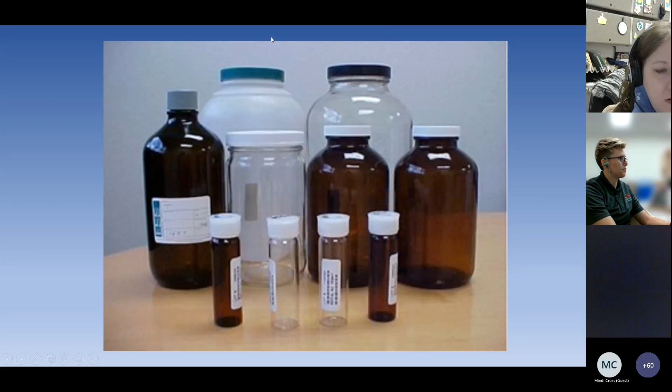Okay, sorry for the wait. While we're trying to figure out if our AZ Water president is going to join, I think this would be a good time to do kind of a mini roundtable.

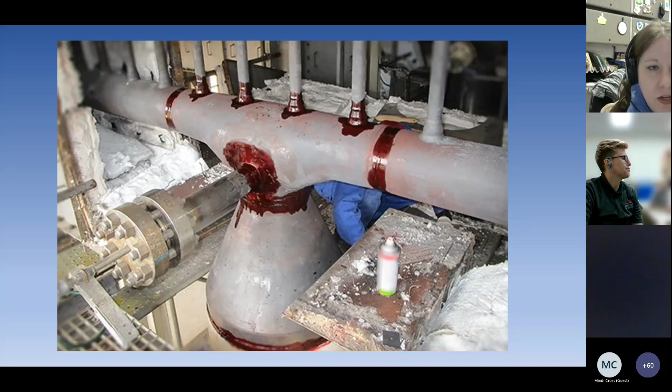So we had a question from one of our AZ Water Pretreatment FOG members about commercial inspections, like FOG type inspections. For those of you who do this for your job, how many do you conduct a week? Or if you have a set criteria, maybe over a month period, how many do you typically accomplish over that period of time? And if there's any specifics, like if you have to hit a number of places, or does that include re-inspections or follow-ups? So if you'd like to put that in the chat, we are curious about your input there.

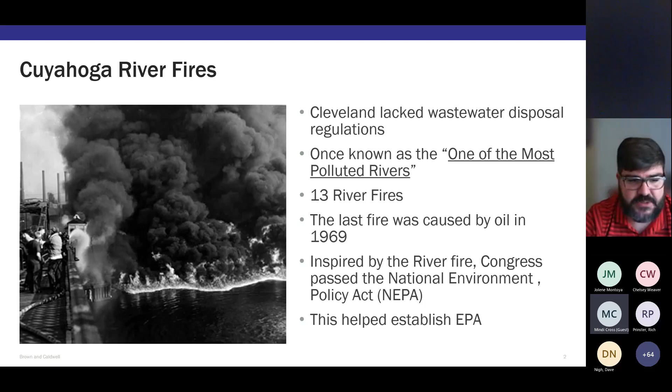And so with that, the Clean Water Act essentially sets up the NPDES program, which, if you're not familiar with that term, stands for National Pollutant Discharge Elimination System. I feel like they could have came up with a little bit easier phrase to say, but that's what we got. And ultimately, it was designed to, as it simply states, eliminate pollutants from waters of the United States. And so with that, we also got the federal pretreatment program.

And so the federal pretreatment program is essentially charged with establishing rules and regulations that help prevent Cuyahoga River fires, right? Help prevent incidents that negatively impact the environment, but also negatively impact the wastewater treatment system as a whole. So the collection system, the workers, the equipment, the treatment plant itself, any potential opportunities for reuse or recycling wastewaters or sludges or biogas, whatever those may be.

The pretreatment program is essentially designed to prevent pollutants from being introduced into the publicly owned treatment works that would cause interference or cause pass-through. So that's essentially the objectives of the National Pretreatment Program. So why do we have pretreatment? So here's just a few images of why we need treatment.

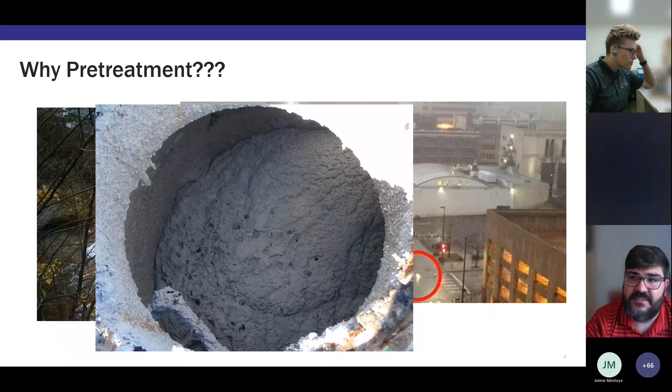It took several days to vector and jet this line to get it to where it would actually flow again. This is foam at a wastewater treatment plant. I don't recommend anyone ever go and stand in the foam at the wastewater treatment plant, but this does periodically occur at treatment plants. A lot of times it can be caused by industrial users.

When I managed the City of Memphis's pretreatment program, we had a soap and shampoo manufacturing facility in town that routinely would, well, they wouldn't try, they would do it. They would discharge off-spec products without any approval, without any treatment or defoamers added. This is not the Memphis wastewater treatment plant, but this is essentially what it would wind up looking like once it got into the aeration basins.

I have young kids and they like to take bubble baths. If you pour bubble bath solution into a jacuzzi hot tub, it just continues to intensify and get bigger and bigger and bigger. And that's essentially what happens in the aeration basin. It's just kind of like a big jacuzzi hot tub, right? And once you get those surfactants and bubbles in there, it really could become a problem at that point. So definitely something to watch for.

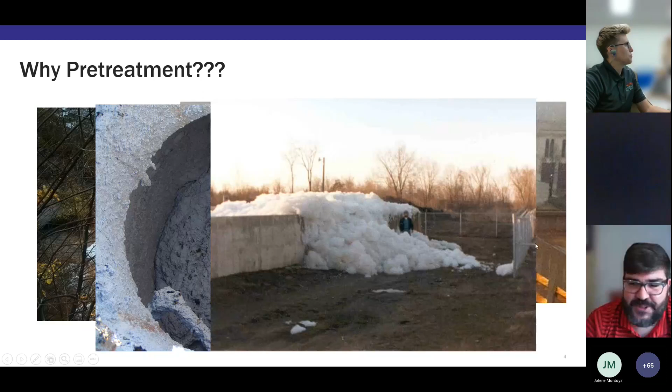And this is just a picture of a fish kill that I found on the internet. Essentially, that's kind of what we're trying to prevent from the receiving stream perspective. The last thing we want is for our receiving stream to wipe out all of the life that lives there. So that would be an example of pass through for sure.

And then finally, this is a picture of a cross section of a sewer line that had the entire bottom corroded out due to low pH discharges downstream of an industrial user. I believe this was a jelly manufacturer, if I'm not mistaken, and they used a lot of cleaning solutions that were acidic as well as caustic, high and low, but predominantly their wastewater was relatively low, and they just absolutely destroyed the downstream collection system.

So what is pretreatment? Now I think we kind of understand why we need it. So the next step is, what is it really? What do we do with respect to pretreatment? So pretreatment, in general, the definition is the reduction of the amount of pollutants or the elimination of those pollutants, or even taking that a step further, alteration of the nature of those pollutants. So maybe converting it into something different that's not so bad or detrimental in the wastewater before it's discharged or introduced into the publicly owned treatment works.

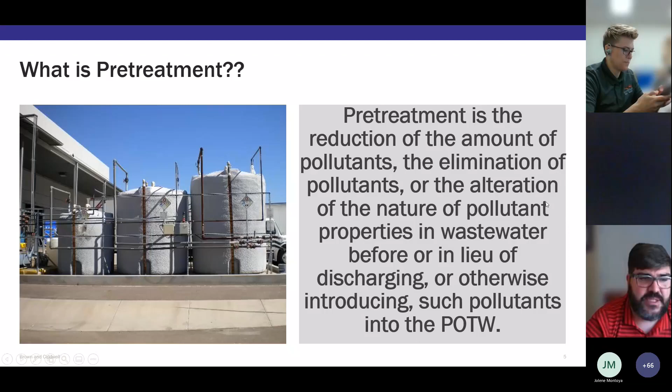So what we mean by that is essentially, it's treating your wastewater in some cases before it's discharged. Maybe it's shipping some of these wastes offsite for alternative disposal, because it just can't be handled very well from a treatment perspective on site. It doesn't do very well in the collection system. So that's another potential for pretreatment. But in general, it's essentially eliminating, reducing, or altering the nature of that pollutant before it gets discharged into the collection system.

And so we have a whole program, essentially. I think a good portion of you work for a municipal pretreatment program, and just like the federal regulations charge EPA with developing and implementing the program at the federal level, that essentially trickles down to us as municipal people to implement in most cases. There's a few caveats, I'll show you in a minute, where the municipalities don't actually implement their own pretreatment programs. But in general, the vast majority of pretreatment programs are operated and implemented by the wastewater utility receiving that waste.

So generally speaking, the federal regulations state that POTWs with a combined design flow of greater than 5 MGD, and you either receive wastewater that's subject to pretreatment standards, so essentially categorical wastewater, or an SIU, so it could be categorical or non-categorical, but facilities that meet that definition of a significant industrial user, or you receive pollutants which could pass through or interfere with the treatment plant, then by federal rule, you're required to develop and implement a pretreatment program.

Now, I say that because there are some caveats to that rule, depending on how your state wants to implement their state program. So I'm in Tennessee, and in Tennessee, it doesn't matter what the size of the treatment plant is.

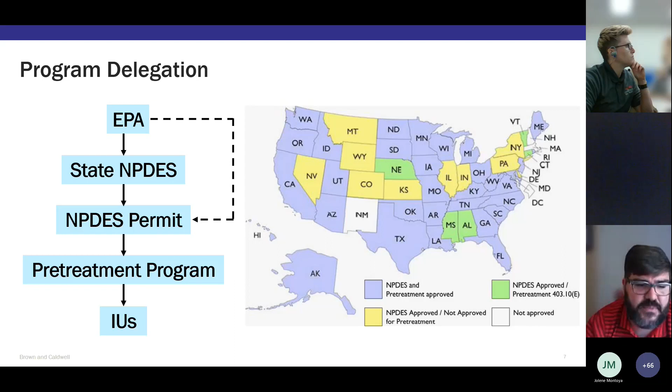And then there are some states that you see in yellow that have approval to issue NPDES permits, but they aren't approved to oversee and regulate pretreatment programs. So Nevada, for example, is one that would be close to you all, where the state doesn't have that delegation, and so EPA Region 9 ultimately regulates those pretreatment programs.

Any questions at this point? Feel free to drop them in the chat, or unmute yourself and speak up. Joshua, it doesn't look like there's anything in the chat for you. Okay, thanks, appreciate it.

So this here, I'm not going to go into a lot of detail about. I just wanted this slide deck to be a place that you could go back and use as a reference. So here basically what we have is the high points of all the federal regulations and where they're located. 40 CFR Part 403, from a municipal pretreatment program perspective, is what regulates us or tells us what we have to go and do.

There are obviously more; there's 403.1 and 403.2 that I've left out. I've only included the ones that are typically referred to or used on a daily basis. But don't take this to mean that those other sections aren't important. They're just not ones that we typically use every single day in our jobs. So, just the high points: 403.3 is where the definitions reside. So when I define the word pretreatment, that comes straight out of 403.3.

403.5 and 6 are pretreatment standards. So prohibited discharges are in 403.5. That's where it essentially says thou shalt not discharge corrosive wastewaters. Thou shalt not discharge waste that would cause an obstruction to the collection system, things like that.

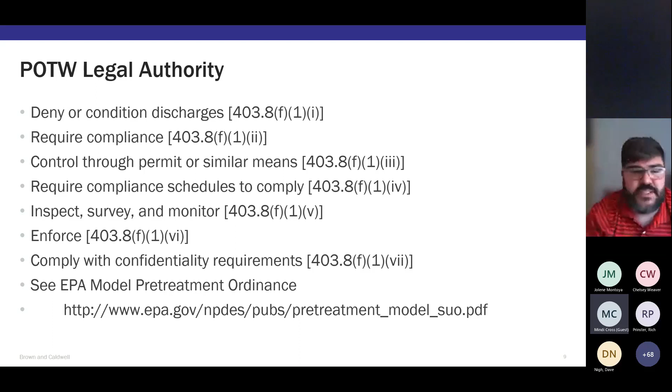So then when we talk about the procedures, what programs are required to do, we're required as pretreatment programs to first and foremost identify and locate all possible industrial users. And that's not just significant industrial users, that's all industrial users. Because we have to then make that determination of whether or not they meet the definition or criteria of an SIU, and then that puts them in a separate category. But we have to locate and identify them first and foremost.

And then once we have identified them, we have to understand the character and volume of pollutants that they may discharge to the treatment plant. And so at that point, we must notify them of any applicable standards that they must meet. Typically speaking, for an SIU, that's done through the permitting mechanism. It's essentially requiring them to submit for and receive a permit before they discharge, and that notifies them of their applicable pretreatment standards, because those standards are in the permit.

Us as pretreatment programs, we have to then receive that analytical data and analyze it to make sure that they're in compliance. We have to conduct random sampling periodically. I think the federal regulations say that we as control authorities have to sample and inspect all of our SIUs annually, and in some cases it can be more frequent than that. So understand and know what your requirements are in either your approved program or in your NPDES permit, because I have run across some programs that require more frequent sampling and inspection of their significant industrial users than the federal definition.

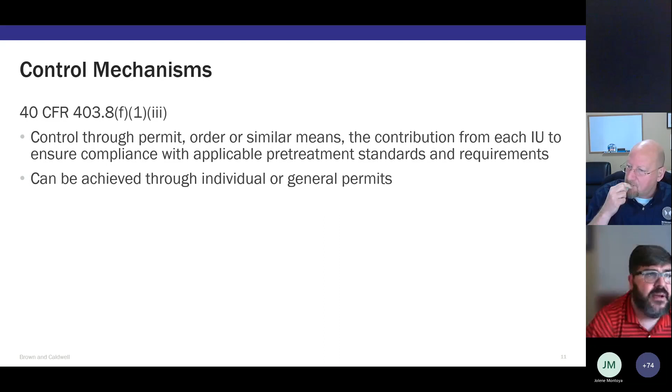So for example, and I'm not saying that you should do this, but I have heard of people that have developed a general permit where there's one document that's the permit for all dental users, and then the dental facilities would submit a notice of intent to seek coverage under that general permit. And ultimately that one permit covers any of those facilities that you approved to seek coverage under that permit. I've also seen it for water utilities that discharge filter backwash water. But it's generally used when you have multiple facilities that are all very similar or essentially identical to one another.

So instead of issuing 10 permits to 10 different industries, you would issue one permit to 10 different industries. So, as the phrase streamlining suggests, it helps minimize the amount of effort and time required to oversee and regulate those facilities.

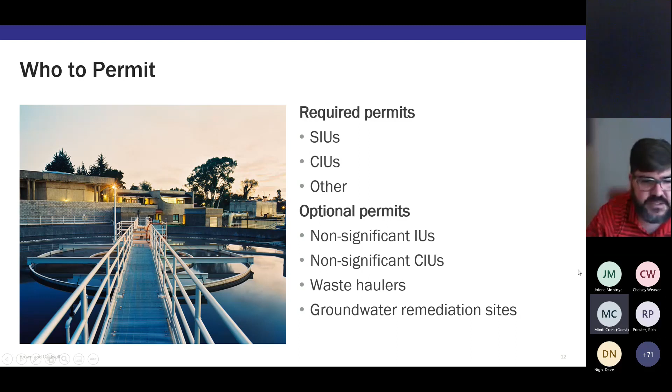So let's keep going. As the pretreatment program, we're required to perform compliance monitoring. I spoke about this earlier, and I just want to point out, we're required to do this independent of any information provided from the industrial user. There are some ways to get around this, but generally speaking, you should take your own equipment out there, your own composite samplers, your own sample tubing, and install your own equipment that's separate and independent from theirs, and collect those samples.

And I have seen where sometimes you'll use their equipment and put a lock on it to make sure that they can't tamper with it. I think there are some caveats for being able to use that equipment. But generally speaking, first and foremost, you should try to use your own, just to ensure that it's independent of anything provided by the industrial user.

These can be announced or unannounced. I typically try to always recommend unannounced initially, but I know that there are certain circumstances where you need to do announced inspections or sampling events, just because maybe it's really difficult to get on site to these facilities. Maybe it's a Department of Defense, a DoD site that requires a lot of security clearances prior to even being able to get on site.

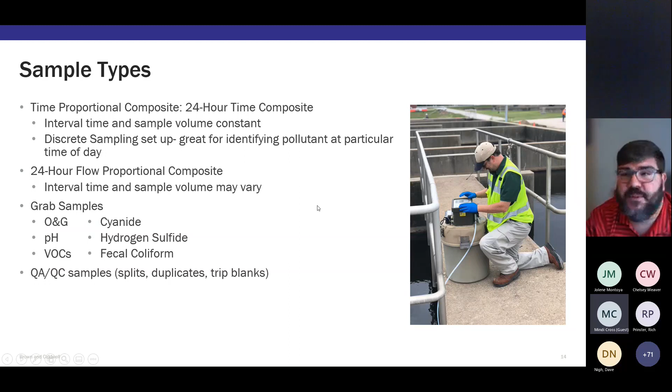Composite flow proportional. I'll just go ahead and tell you, flow proportional sampling may be the most difficult thing that you will ever attempt to do as a pretreatment program. As Christy's saying, it can be virtually impossible in certain circumstances. So I'm not going to go into my rant about flow proportional sampling, but I've tried to do it. I have done it, and it is extremely difficult. I don't think the people that wrote the federal regulations ever went out and collected flow proportional samples. I'll say that.

And so that's why we typically try our best to collect flow proportional sampling where we can, because time proportional is not a very accurate representation of the waste stream that's being discharged for facilities that have high variability in their flow. So just be aware of that.

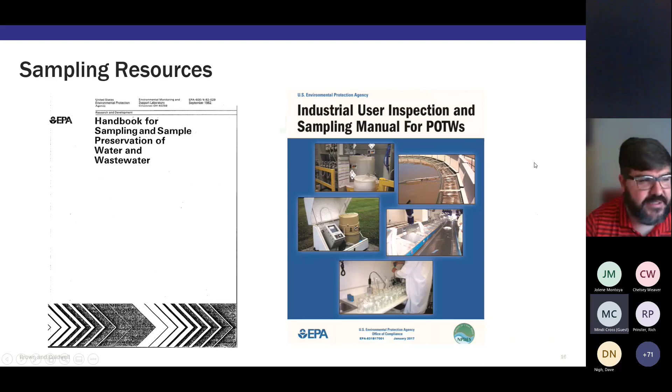This is why we go out and conduct compliance inspections, to make sure that the facilities are doing what they say they're doing, discharging where they say they're discharging, and discharging what they're supposed to be discharging. I can't stress enough, I think that compliance inspections are probably, just in my personal opinion, the most important thing that you can go out and do at these facilities.

And so we're required to conduct this surveillance as municipal programs. We're required at a minimum annually to go out and look at these facilities. Now, with some of the new streamlining regulations, for example, non-significant categorical industrial user or middle tier categorical industrial user, which middle tier isn't used a whole lot, there's some reductions in the frequencies that you have to go out and perform these inspections.

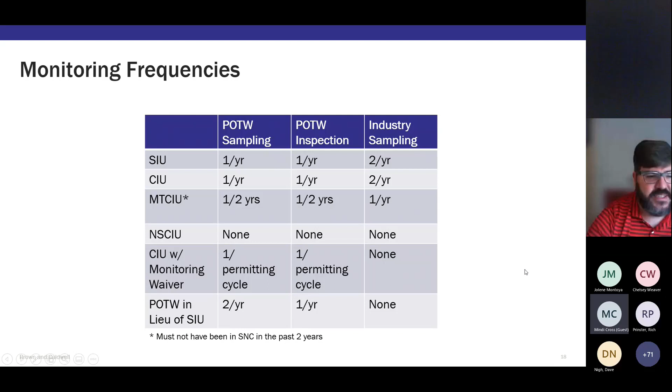And so I have this broken down in a matrix style format for you to use and just to have as a resource, just so you're familiar. So there's several more scenarios than one would typically think, but hopefully you can use this at some point and help you understand what you're supposed to do for each different type of industrial user.

So with those inspections, we have two different styles. We have a scheduled inspection that we're going to do. That's our annual inspection. We're going to go out and do those every single year. Again, we can do those announced or unannounced. And I understand reasons for doing both, but typically speaking, I strongly recommend at least to initially try the unannounced style. And then, if it's truly not feasible, then try the announced style.

But I will say that a lot of times you'll get a little pushback. I've seen the security guards that sit out front of these industries. Sometimes they feel like they are police officers on the SWAT team and special forces, and you've got to be understanding that they're just there doing their job. Their job is to keep people out of the facility. And so sometimes unannounced inspections throw them for a loop, and they aren't typically used to that. So just be aware that you may have to be a little bit understanding and patient sometimes

to get on site. But just know that unannounced inspection is really the way to go to ensure that they don't have any opportunity to make any changes prior to you getting there. So you can get a true representation of what's occurring on what we think is a daily basis without them knowing that we're coming.

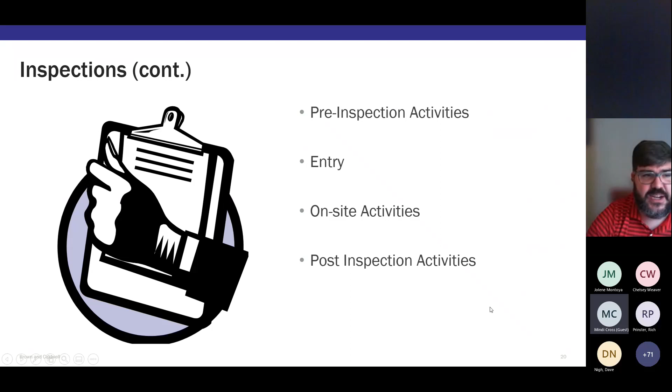So with the inspections, I'm going to start trying to go through this a little bit quick, just to make sure that we get through all of it. But pre-inspection activities, kind of entry, and then once you're on site, kind of what we're going to do, and then the post-inspection work that we're going to do after we do the inspection.

So before you go on site, I can't stress enough, read through their file, read through their permit, understand when their permit's coming up for renewal. Maybe you let them know, or maybe you carry them a permit application to complete and fill out. But kind of just let them know.

I can't tell you how many, like these industries, they don't read their permits routinely, and in a lot of cases, if ever. And so part of being a pretreatment program inspector, a pretreatment technician, pretreatment manager, permit writer, enforcement person, whatever you're doing, a lot of times we're out there kind of as babysitters for these industries, and we're having to hold their hands and tell them everything that they have to do that's already in their permit that they should already know.

So just know you're going to get frustrated. That's part of the job. And it just kind of is what it is. And I'll go ahead and apologize to you all for that, because if you haven't already experienced that, you will experience that sometime in the very near future.

But read through the permit, understand what category that they're regulated under, if they're a categorical industry, understand what their average flows are from the facility, confirm whether or not they've had any recent or historical recurrence of violations. And then I always say, take the last inspection form with you, print it out, take a copy of it with you. Maybe if you're kind of in the digital age now, you can have those electronically on your tablet. But take those with you and review those.

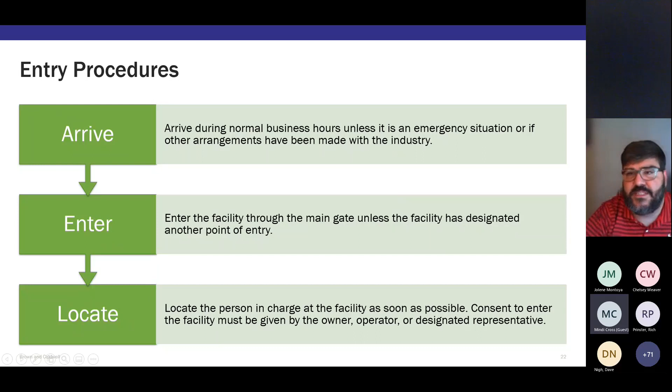You need to get on site to enter. And so a lot of times that's going to be through a security guard of some sort. And then you need to just kind of immediately locate the person that you need to go and see. That may be their EHS manager, maybe the environmental manager, maybe the wastewater treatment operator, maybe it's the plant manager or the maintenance manager. It could be a whole plethora of different people. But you need to find the person that you're there to see and go through and start the inspection process.

In the event that you are denied entry, I think the first thing that you need to do is present your credentials. Say, hey, I'm Josh Ballantyne. I work for the city of so-and-so, and I am here on behalf of the city to inspect this facility, who holds a wastewater discharge permit that grants me the authority to come on site. And that may or may not get you anywhere, and just very nicely, tactfully.

I can't stress enough to not try and escalate the situation, because that just is a recipe for disaster. But tactfully discuss, if they deny you entry, why are they denying you entry? Why can't you get on site? Maybe they have a very valid reason.

I've actually been to a prison facility out in California where we were doing an inspection at a prison. It was a high security prison. And while we were on site, we were getting ready to go in the door, and they rushed us into this totally different room after they got this radio call. And there was a riot in the prison at that moment. And all of a sudden, these like SWAT team guys start running in.

And that was a very valid reason to deny us entry at that point in time, until they got that circumstance under control. So just because you get denied entry doesn't mean that there's not a very valid reason. It could be a safety issue, which, typically speaking, these industries take safety very, very seriously, especially for somebody who's not even an employee of theirs to come on site.

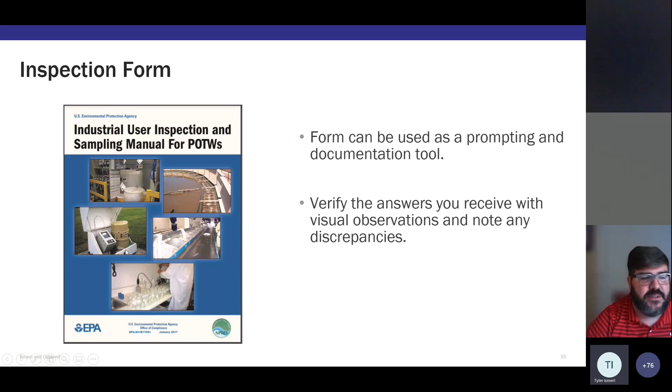I like the idea of a checklist or an inspection form because it teases you to ask certain questions. Kind of forces you. I had some inspectors that never wanted to go and look at chemical storage, and I intentionally put questions about their chemical storage area on our inspection form to force them to physically go there, lay eyes on it, and ask questions about it. I can't stress enough that an inspection form or some form of documentation of the inspection has to occur. And I think there's an example of that in that inspection manual. Maybe in the appendix, there's a template, I think.

So some of the questions that you're going to ask in the pre-inspection, I like to do a sit down with the people and ask several questions before we actually go out on site, because it may be loud, it may be difficult to hear, or hot and humid, and maybe your glasses are fogging up and it's hard to see and write. So I like to ask as many questions as I can up front before we actually go out on the floor. So number of employees, the shifts, water usage records.

They're not necessarily super relevant to wastewater, but what they do is they give us an idea of, are they a growing industry? Are things changing? Are they losing people or shifts? That gives us an idea of when they may be discharging.

If they were a 3-shift a day 24/7 facility, and now they're down to one shift, we can expect a totally different discharge pattern from those facilities, and maybe even a substantial reduction in volume. So sit down and ask as many questions as you can ahead of time before going out into the facility.

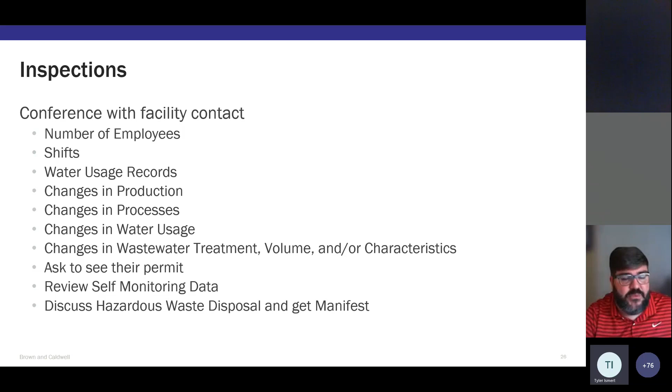And then once you get in, make sure you're wearing all the proper PPE. They'll typically tell you everything you have to have and can provide that to you in most cases. But make sure, from a safety perspective, you've got all the proper PPE.

Some of the places that we're going to want to walk through are the manufacturing and operations areas, depending on the type of facility. Maybe you want to look at boiler blowdown. In some instances, for example, the battery manufacturing category requires that the showers and hand sinks are actually part of the categorical waste. So you may want to walk through the bathrooms or the showers, or because of the picture I showed you earlier, you may want to walk through every single restroom in the facility just to make sure they don't have some crazy 4-inch piece of PVC coming out the wall into the toilet.

So I'm not going to go through all of these, but these are just some of the areas that you want to pay special attention to or ask specific questions about. Off-spec products are another good example of something that you need to ask about. If they're a manufacturing facility that makes some chemical or some product, maybe even beer at a brewery, what do they do with that off-spec product? How do they get rid of it? How do they dispose of it? In a lot of cases, you're going to find out they discharge it to sewer. So just be aware of that, make sure to do a thorough inspection, and really ask a lot of questions.

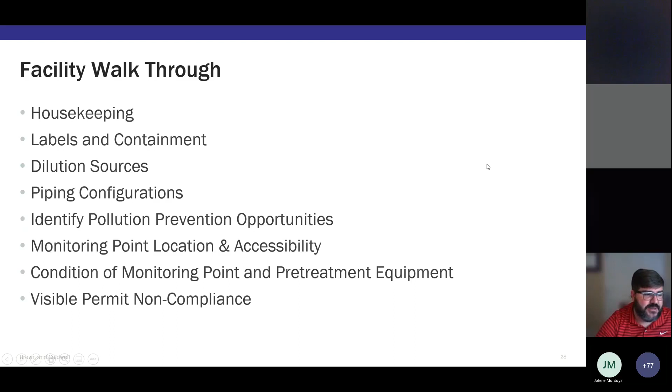I'm not saying that all dirty facilities are going to have problems, because some manufacturing operations are just nasty and dirty. But generally speaking, the ones that have pretty major environmental violations typically have housekeeping issues as well. So that can be an indicator of something to look for. Look for dilution sources, just visible permit non-compliance. You'd be surprised how often you'll see some of that. And I think I have some pictures coming up where we'll see a few things.

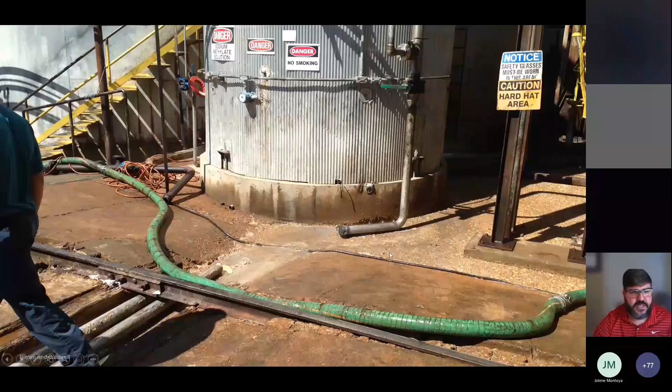This was that same biodiesel manufacturing facility that we actually caught illegally discharging untreated wastewater to a creek in the back. And so essentially this was their processing and treatment tank, and this was the discharge off of it. And what they did was, you can see grease running out of this line. They would connect these two pipes with a piece of this flexible hose, and then pump it to the back of the facility into a ditch.

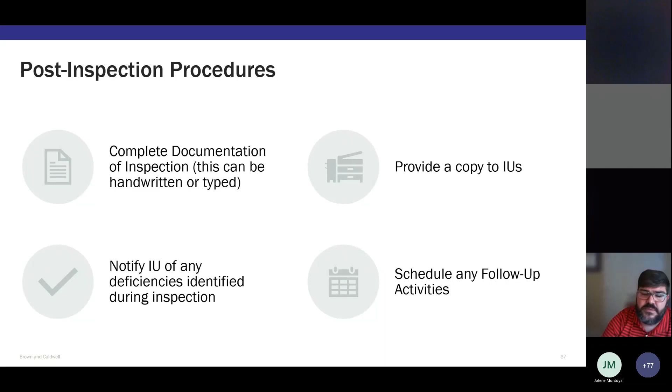Are there any questions or comments that you have about inspections or sampling, or just general pretreatment?

Well, Josh, it looks like there's a long comment question. Yeah, let me try, and somebody's got their hand raised too. Yeah, go ahead and ask. If somebody has their hand raised and wants to ask a question, go ahead and just ask that while I read through this. Keith, go ahead and unmute yourself, or I'll unmute you. Keith Schatzman, sorry if I mispronounced that. You can unmute yourself and ask the question if you want. I think you should be able to unmute yourself.

So while he's trying to figure that out, I'm going to talk about Diana's question and scenario. I actually just had a phone call 2 days ago about a very similar scenario, and I'm just going to go ahead and tell you, I don't have the answer to this. I have done a lot of research recently, and feel free, anyone that can find it, send it to me. I cannot actually find a very good EPA definition of the word dilution.

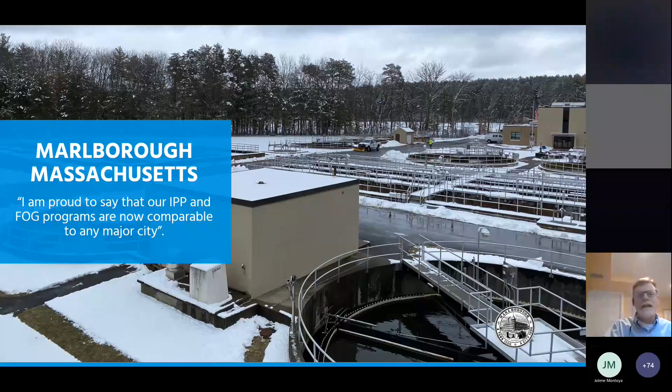And ultimately, he's built this program that now provides a lot of visibility into all of his activities. Everything's scheduled, and he really feels like he's running his program like a major city.

So as we bring these things together, we as an organization came together and really thought big around our mission, where we want to be able to organize the world's water information for faster and better decisions. And we can break this down into a lot of different things, but ultimately we are now a part of a much larger organization. It's really exciting to be in the same division as Hach and OTT and Pall, in order to bring these technologies and solutions together. And I'll talk about Hach in just a little bit.

I wanted to just provide an overview of the portfolio that we're assembling and have assembled to this point, and will continue to grow in order to meet that vision of organizing the world's data, so that those that participate really have access to better decision-making processes, and ultimately being able to create stronger and more resilient communities.

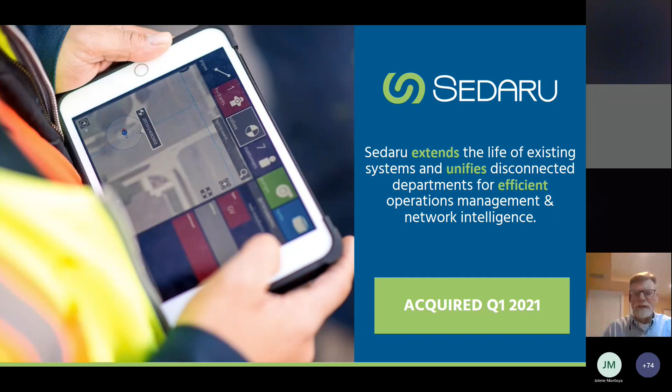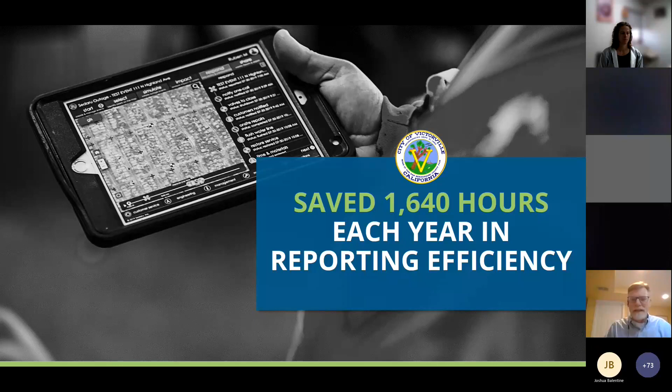And so being able to tie that all together where you can still use best of breed technology for customer information management systems, for instance, and then bringing it together through a GIS-enabled application to provide digital inspections and investigation through Sedaru is really powerful. And it turns out they did a study and it saved over 1,600 hours each year in reporting efficiencies by getting away from paper and aligning the requests with the different procedures that the operations maintenance team had to do.

So really knowing who you're regulating, automating the data collection through different technologies and collecting that data digitally so that you can really use it, ensuring compliance and all of these things come together to strengthen your community by providing a safer way of collecting and managing that data.

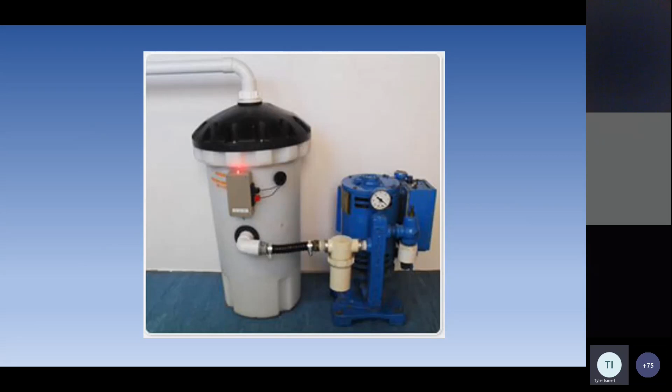Hey Dave, can you play the slideshow? I'm trying. Chelsea, is it playing okay? Yep. Thanks. No problem. You just can't tell when you're doing it yourself.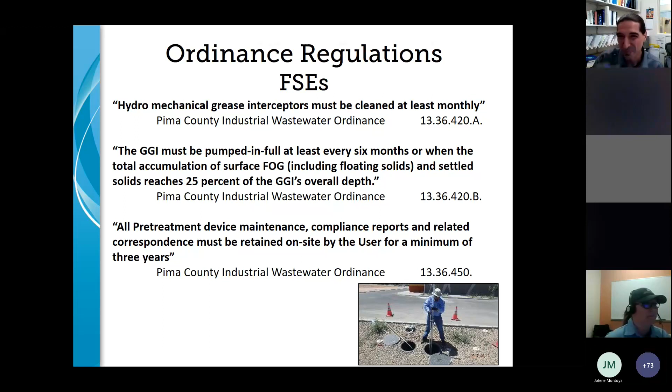All right, so like I said, our FSEs are required to properly maintain their interceptors. So pumpers will have to go out and collect that waste. And here in Pima County, we have a septage receiving station, but no grease waste is actually accepted there. So instead, we have 4 permitted private facilities that can accept grease waste. And we consider these facilities significant industrial users. So as such, we inspect and sample them twice a year, and they send us self-monitoring reports quarterly. So we've got to make sure that they're maintaining our regulations.

All right, so now we get to talk about the challenges that we were experiencing that really led up to our preferred pumper program. Like I stated, in our ordinance, restaurants need to keep those pumping records on site for us to review, because during our inspection process, we want to verify their frequency and who's pumping them. I'm sure you guys have seen this too, but for the most part, the records really aren't kept on site, especially for chain restaurants. Chain restaurants send it to a corporate office that's off site.

And so another issue is that the on-site employees really don't know where the records are kept, or who's pumping them, or how frequently they're coming, because that's not their job. They're there to work the kitchen, work the floor, whatever. They don't care what's being pumped in the back. And prior to starting our program, approximately 30% of our inspections would result in outstanding records requests. So this means that restaurant would be in non-compliance with IWC.

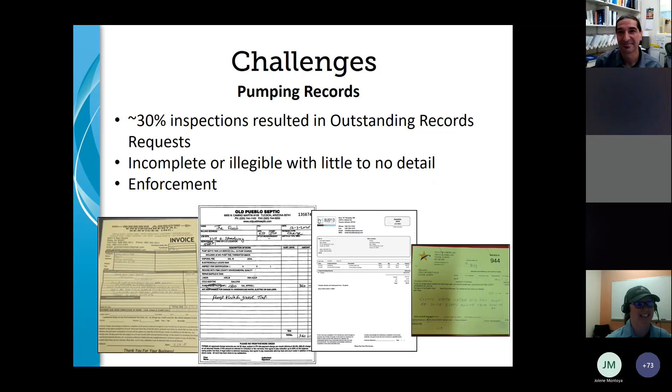And another issue that we run into is that we'll go to an interceptor and only the inlet chamber has been pumped out. Yes, that is where most of the grease is accumulating, but still, our ordinance states you need to pump the entire interceptor. Maybe the pumper didn't know that they had to pump both. I don't know. The training could be different from different pumpers. But either way, they need to pump the entire interceptor, not just the inlet. So adding it to our challenges.

All right, so when trying to come up with possible solutions for the pumping record issue, we thought of maybe using uniform manifests for all the pumpers, or the automated reporting with FOG software, which I love software. Like, don't get me wrong, I love technology. Another thought we had was maybe a new permitting system to help with enforcement. Again, 4,000 restaurants, a whole new permitting system for them could be cumbersome as well.

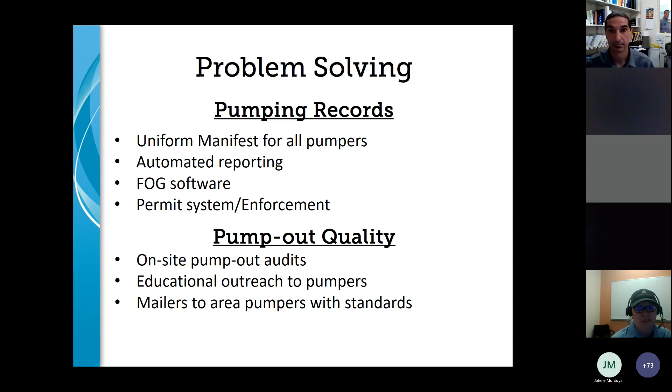So while we were coming up with those possible solutions for our records and quality of pumpings, another thought popped into my head. Back in 2018, I attended the AZ-FOG Fall Workshop up in Tempe, and I heard an awesome presentation about a preferred pumper program. Clayton Brown from the Western States Alliance did a presentation about the preferred pumper program in the Oregon area, and it really stuck with me. I thought it was a fantastic idea. And with a few alterations, we thought we may be able to use it to help us with our problems.

Now, before we can really formulate any program, we really have to establish what our vision and direction is here in Pima County. Our director is very, very business friendly. So any program we came up with, we would have to sell them on from the customer service side of things. We also thought of all the other possibilities, like the mandatory manifests or new software. But for anything like that, we really received a lot of pushback, because it's really hard to convince people to either tighten up our ordinance or force companies to purchase new software when the problem really isn't visible.

I mean, even with our low number of SSOs, we know that we are not capturing all of the restaurant grease before it gets to the sewer. There's no way. But because of our lack of SSOs, it makes it really hard to convince, like, a board of supervisors to agree to a more stringent policy that would cost restaurants and pumpers money.

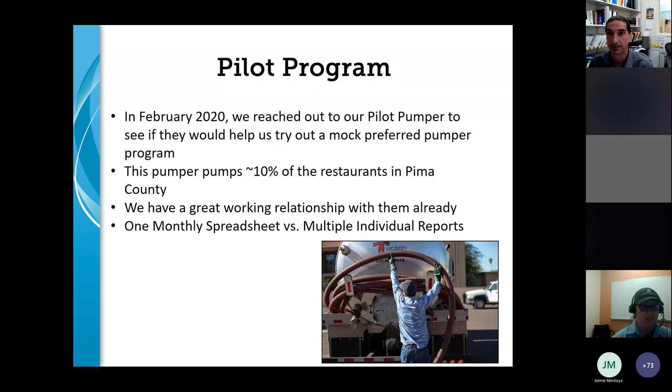And for them, that was very time consuming because they had to go into all their files and scan things individually to us, and they didn't like doing it. So instead of having them do those individual scans, we thought, well, what if you just send us one monthly spreadsheet that basically had whoever you pumped during that previous month. So in essence, in the same amount of time that it would take them to send us one customer's invoices, we were able to get all of their customers for the previous month, and they loved that idea.

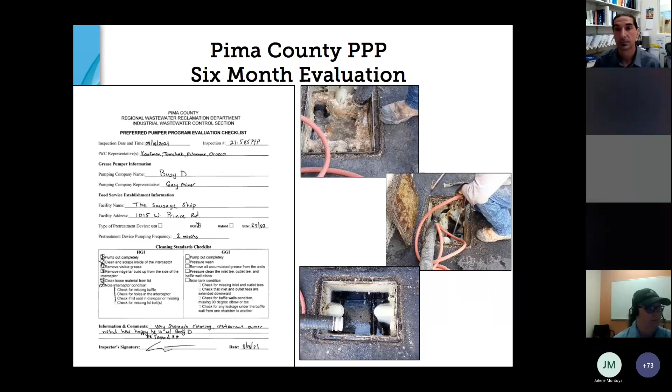And for all these documents that I'm showing, or any of the information, you can find all of them on our website, pima.gov/preferredpumper, or reach out to me if you want to see or review anything.

All right, so now the fun part. What are the benefits? For the FSE, if they use a preferred pumper, that restaurant will be in compliance with our ordinance record keeping, since we have it all in our system. And proper maintenance really helps prevent discharges of fats, oils, and grease that might clog their drains, as well as our POTW. And maintenance costs for the pumping are way less than if there's an SSO that they caused because of their FOG.

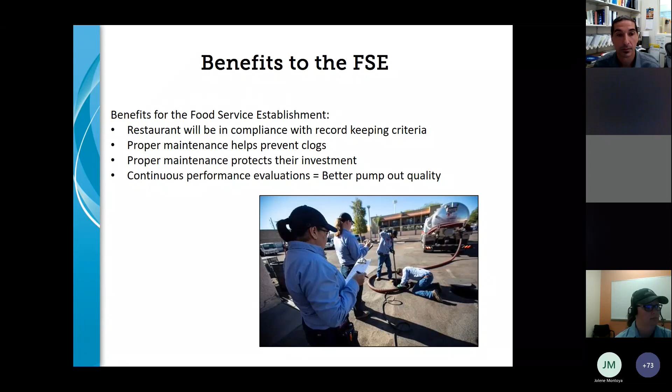Now, as far as the pumpers go, like I stated, the members are listed on our website, as well as that handout, which is distributed to all the restaurants during our routine inspections. And because of our open line of communication between the pumpers and IWC, the business assistance side for the pumper is way more streamlined. They can call me anytime. They know my voice very well at this point. And anytime they have an issue, they feel comfortable calling me, and I love that.

And like I said, that decal really is used to broadcast their membership in the program. It shows they're a cut above the rest, which is also very beneficial for them.

And really the best benefit of all is whatever benefits us, right? For us, we've seen restaurants staying in compliance with our record keeping criteria, which is great. The uniform cleaning standards have really helped with better quality pump outs. We've been able to help restaurants get onto proper maintenance schedules with their pumper, which honestly can result in less grease related SSOs.

We've had more beneficial inspections because we know where problem areas might arise already, so let's hit those areas. And we've seen fewer non-compliant restaurants. We went from 30% of our inspections resulting in outstanding records requests to only 12% of our inspections having those outstanding records, which is huge. That's a huge number to drop down to.

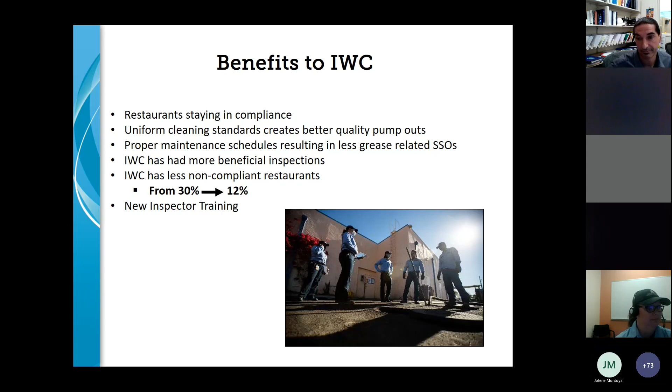All right, now we get to do the fun part where it's all the cool cases we've seen because of this program. So this particular restaurant was on a bi-weekly pumping schedule because of how quickly their HGI was filling up. And basically they stopped paying their pumper. And so on our spreadsheet we saw this "do not service." No idea what that meant.

So I gave the pumper a call. They notified me that means they are no longer going to be going out there because of the lack of payment. So obviously the restaurant could change to a different pumper and they could be getting serviced by someone else, which is fantastic. At least then it's getting maintained. But we had to find out. So we went out there. And at the point when we had gotten there, it had been a year since they were last pumped. And this is what we found.

This is completely disgusting. It is just solid grease. Kind of looks like eggs, but not the eggs you want to eat. So by the time we got out there, the water wasn't even able to flow through. It was just a trickle. And so they were getting backups and everything else, guaranteed. And what was great about this is, honestly, we never would have known about any of this until there was an overflow or an odor complaint or something like that.

And so as soon as we opened it, they were trying to tell me that they had just had this pumped a couple weeks ago. Try a better lie, please. But anyway, right then and there, we had them call their pumper, and they took care of all those back payments right there on the spot. And the pumper was out there the very next day, cleaned it all out, nice and pretty.

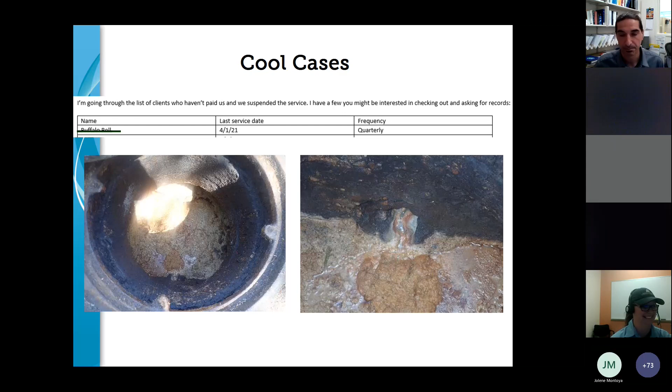All right, so this next set, these pictures are of one restaurant owner, but two different restaurants. So what happened was we received these pictures from a pumper in the field. He actually texted them to me, just as a, hey, FYI, we've been telling this restaurant owner for a while that their HGIs just aren't working anymore. And a lot of the grease was actually seeping into the ground underneath the interceptor on the left, so much so that it wasn't even getting to the outlet pipe. So at that point, it's not our problem, right?

It's not getting to the POTW. Just kidding, just kidding.

And then the location on the right, this one was actually part of a larger investigation because Conveyance saw a large amount of grease in the main public sewer line, and they asked us for help in finding out where it was coming from. We had this information on hand, which was great, and we were able to get the owner to replace the busted up one very quickly. That way they could avoid paying cleaning costs to Conveyance. So in 1 month, we went from this janky unit to a brand new high efficiency unit, and everyone's happy.

Yeah, and just another thing, Court, since you started engaging in about February of 2020 with the one pumper, and we have some more working through the program, right now we've had 16 installations of grease interceptors, just replacements basically, from the information that we got either directly from the pumper or from the monthly lists that they've sent us, where in the comments section they're writing in the poor conditions of some of these interceptors, and with subsequent inspections we get them replaced.

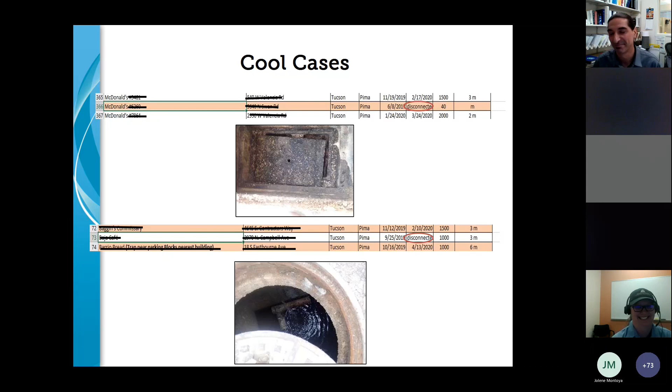That makes it very hard for us to enforce or go after restaurants for intentionally bypassing their grease interceptor, because they might have been directed to do that by us. Thanks, Court. Yeah, fun situations.

All right, this one honestly really surprised me. So I got a call from one of our pumpers. It was late in the afternoon. Apparently they'd been jetting this particular restaurant because they were having backups into the kitchen. But they were telling me it's not their interceptor. They wanted us to get out there because they were worried that maybe the private line in the parking lot had collapsed or something. So letting us know, hey, this is about to overflow.

So we went out. It was indeed starting to overflow at the manhole just past the interceptor, and it was flowing down the drive-through. And obviously, I don't understand this, but people don't care. It makes no sense to me. That's literally raw sewage, and they're just going to keep driving through. Whatever. People are weird. So we saw the flowing.

Turned out the private line really was so plugged up that it needed to be excavated ASAP. And the restaurant wasn't really pushing for that to happen very fast. They didn't want to close. So we had to nudge them. And in fact, Court, I went out there that afternoon and saw what these pictures are showing, except for the excavation part, and engaged with the restaurant manager to, one, make sure that he was aware that this was going on.

Two, that they had the pumper on standby continually to come out to evacuate. And three, you've got to close down this restaurant. They were not inclined to do that. So again, using my relationships with other Pima County entities, including Department of Environmental Quality and Consumer Health and Food Safety. Those folks were more than eager to come out and make sure that the sewage overflow was going to stop immediately.

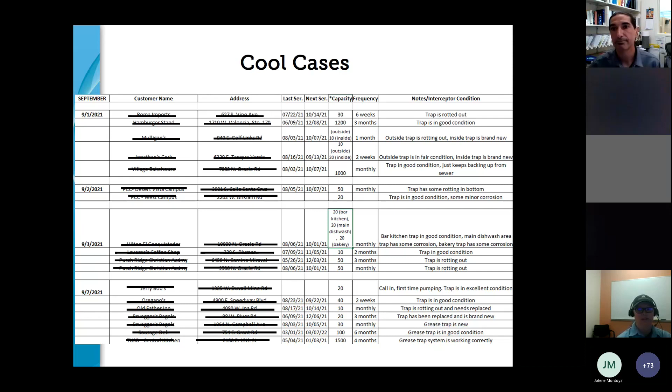Thank you. So now we'll open it up. If you guys have any questions, we'd be happy to answer it. And if I don't know it, I'll have Jason answer it. Well, first off, thank you, Courtney and Jason, for a great presentation. It was very informative and very cool to see how you implemented this. There have been quite a few questions during your presentation, and I think Jason has answered most, but some of the things are like, what happens if the preferred hauler violates their good standing after you have already approved them?

Yeah, so the pumper themselves, they know that it is a continual evaluation thing where we go directly to them. We tell them what the issue is. If they don't fix the problem, they will be removed from that program. And they do have the option to fix whatever issues they're having and get back on, but then they'll have to go through the evaluation process again and do the whole thing step by step. So far, everyone has been super receptive, so we haven't had that issue. It is a very new program, though. So I'm sure we're eventually going to have to deal with that kind of thing, but it is written into our standards that it's voluntary, and we can remove you if you don't follow our rules.

Thank you. And somebody asked if you require inlet plumbing in Pima County. Hang on one second. I think that was in reference to the one where it was backing up into the inlet. Jason, do you have an answer for that one? Oh, you're muted. Thanks, Court. Sorry, was the question about the inlet? Yeah, do you require inlet plumbing?

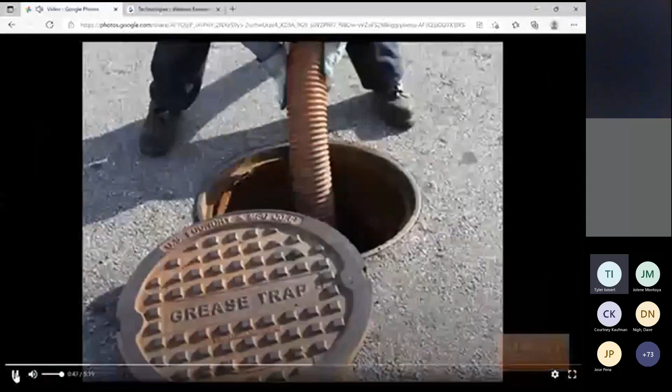What is Mihal Contracting? Mihal Contracting is a general contractor and wastewater service company. We self-perform the installation of pretreatment systems, including lift stations, grease traps, and holding tanks. We also work on compliance points for the cities, including metering manholes, vaults, and flumes. Along with all of that, we also perform pH and flow measurement equipment.

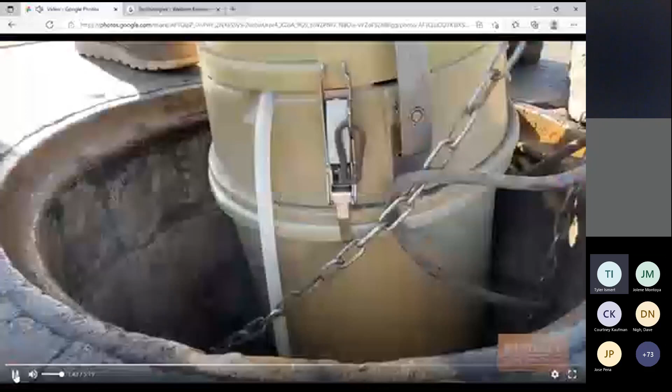Once the equipment is in place, Mihal Contracting has 10 technicians that are skillfully trained to provide services ranging from daily cleaning to preventative maintenance to monthly calibrations and even after-hour service calls in order to keep the systems and facilities operational. Mihal's technicians are on call after hours and even on the weekends to accommodate the emergency unexpected needs of these systems. Mihal also performs the required routine wastewater sampling and prepares our clients' monthly SMRs that they can deliver to the city. Mihal has been trained at ISCO headquarters to service and repair all ISCO samplers. We do it right here in-house.

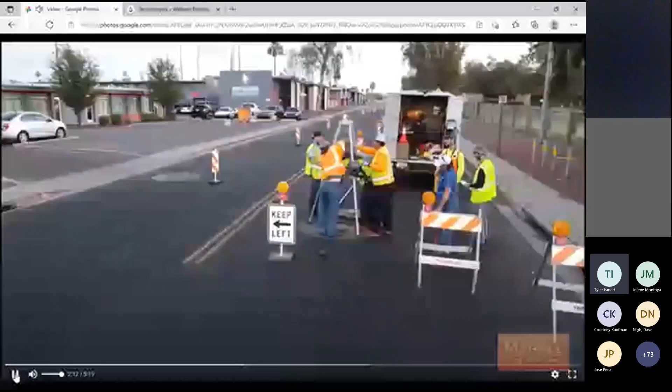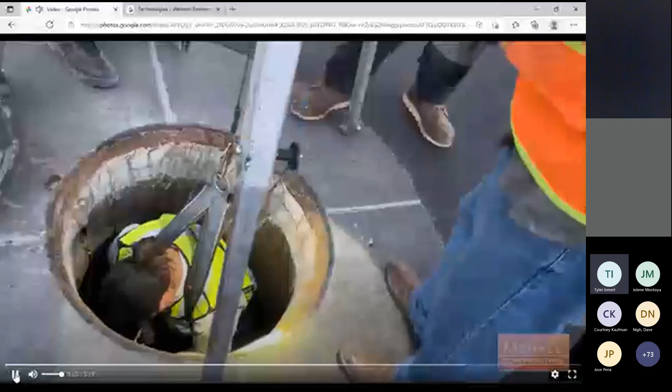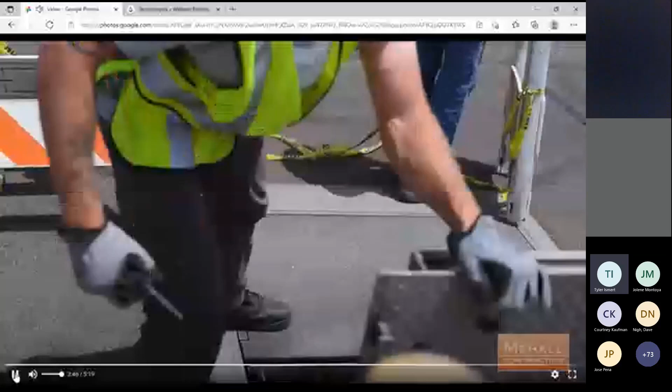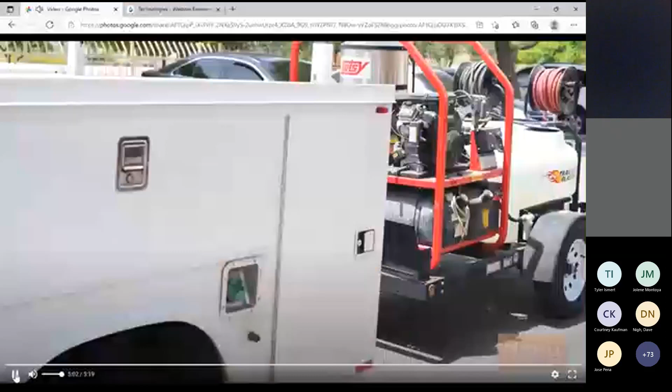The Mihal Contracting team is trained to be in confined space and has installed over 100 flow measuring devices for both public and private use. Mihal Contracting performs dye studies as well. This helps assist companies in locating sewer lines in facilities that do not have accurate plans. We also frequently work with engineers upfront on the design phase to ensure proper equipment and layout to simplify the ongoing operations and maintenance services. We are the backbone to the Valley's water treatment and work diligently to ensure quality and instill peace of mind for our customers and their systems. Don't believe us? Take a look for yourself. What's Mihal Contracting?